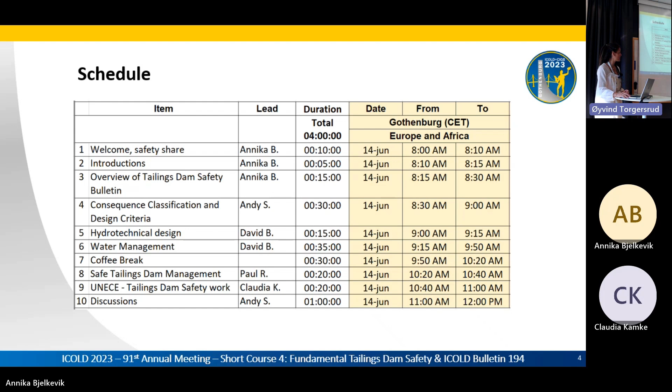So the introductions. I want to talk a little bit about why tailings dam safety is important, and I guess that's not a new question to you all. I guess everyone knows why it's important, but also a historical perspective in a way, and a little bit put the new bulletin into a global context.

So the text is fairly small in the figure here, but tailings dams have a history of about 100 years, a little bit more now, maybe. And in the beginning, the tailings dams were small. The volume of tailings was not so much, and the dams were fairly small. I don't believe that the information on how many tailings dam failures there were in the beginning is complete. We probably don't know all of them.

But in the 70s or in the 40s, high capacity earth moving equipment was introduced, and then it was easier to build larger dams. And then in the 60s, the increase in production and larger tailings dams was quite significant, and that also increased the number of failures.

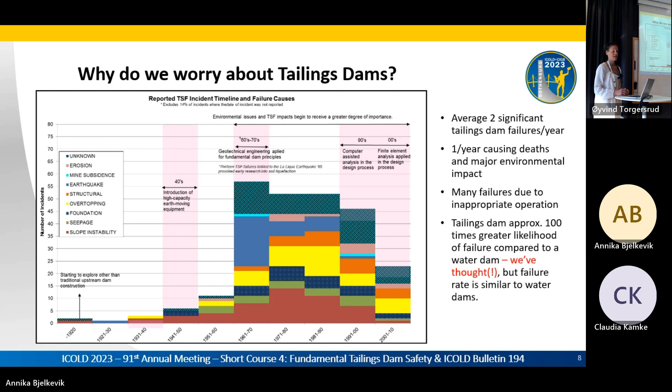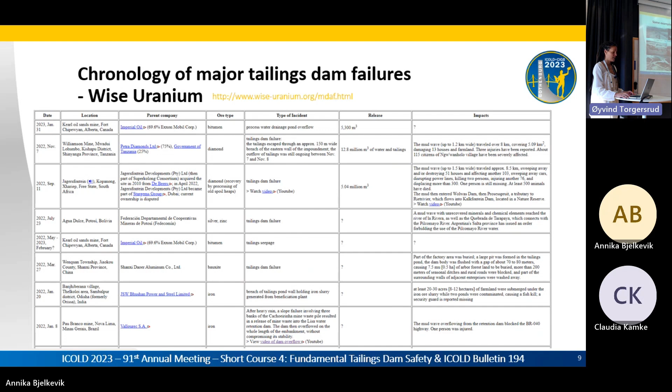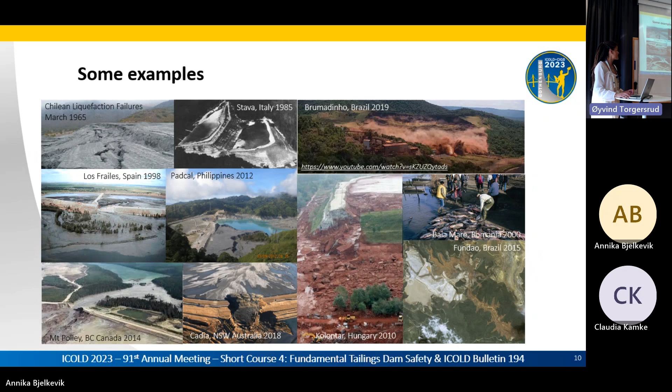And maybe all of you already know this web page, WISE Uranium, where most failures are listed. And we do also know a lot of examples of tailings dam failures that have happened recently, or not just recently, and we don't want to see this. And the question is, can this sort of happen to you?

These are statistics from Nayan Rana, who's a member of our committee, from his thesis work. The failure rate is more or less constant over time. We see increasing volumes because the dams are getting larger. The failure modes continue to happen, and the number of fatalities is more or less the same. And this is something that the industry needs to change.

And there has been a world response to this. Professional bodies like ICOLD, ANCOLD, CDA and others were doing a lot of things before, but even more now, and also industry guidelines like from ICMM and MAC. And as we heard from the keynote speaker, John Houchin, yesterday, the investors have had enough. And if the money doesn't come, the industry really has to change.

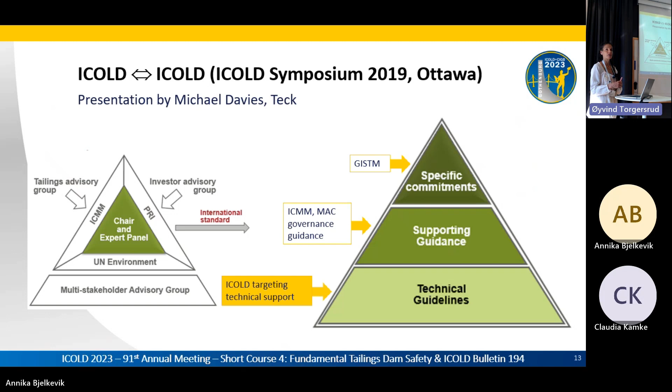And then we have the technical guidance, where ICOLD can play a role and help out with the technical guidelines. The ICOLD Tailings Dam Committee has over the years produced a number of bulletins with technical guidance. The last one, Tailings Dam Safety, is on the ICOLD webpage as a preprint. We don't really know when it's going to be published and available for everyone, so at the moment only members of ICOLD can get hold of it. So that was an introduction, and now the overview of the bulletin.

We worked on this bulletin for about four years, with a working group representing Canada, Australia, Sweden, Brazil, the Czech Republic, South Africa, the US, and the UK. The rest of the committee members also reviewed the bulletin. All the national member countries could review it, and we received quite a few comments. Some international experts were also asked to review it. So we think it's thoroughly worked through, but we're already looking at updating it. We'll see if it's published before we have a version 2.

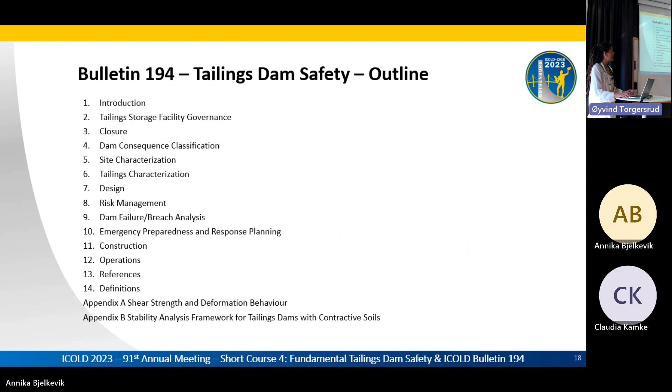So this is the outline of the bulletin. I like to visualize tailings dam safety, and maybe other safety areas, like a three-legged stool, where governance is the seat, and then you have design, construction and operation, and they're all important. You can't sit on the stool if those four parts are not there. The corporate culture within the dam owner company is also important, and I visualize that as the material of the stool. If it's not a good material, it won't last long anyway. So all these aspects are really important; the bulletin focuses on design, but the other parts are equally important.

I also want to highlight that the third chapter is the closure chapter. Closure is really important, and you need to plan for closure at the start, but often closure comes at the end of documents, and we really wanted to put it at the beginning of the document to emphasize it even further.

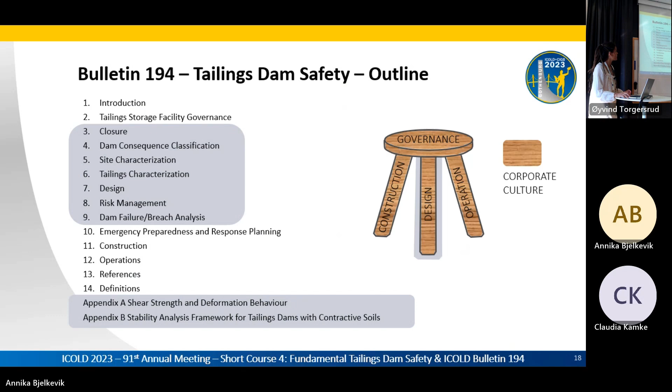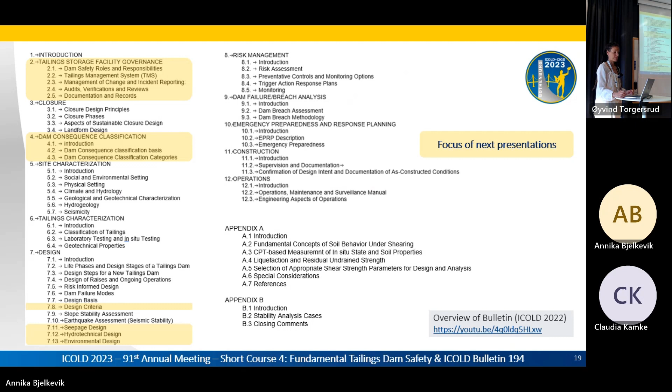And this is sort of the next level of headlines from the bulletin. The yellow marked ones will be covered by my colleagues from the committee in the coming presentations today, and the rest I will go through fairly briefly now.

So closure needs to be included already from the start of the project. It's difficult if it's an old facility and closure was not included from the start, but as soon as possible, start planning for closure and construct and operate the facility towards closure. So in a way, I like to see mining operations as a measure to create the closure goal instead of just mining. So trying to make closure a goal equal to more or less the production to mine.

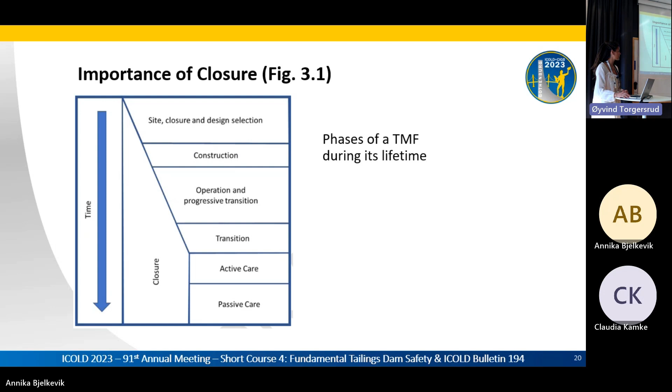And then we know that planning for mining is not that easy. It's changing over time. You don't know when you start a new mine. I've never heard of a mine that started and finished at the end of mine life that was originally set from the beginning. So things are changing, and we need to be flexible and review things and change as we go. And then when operation closes down, we have the transition phase, and after that, the closure measures are hopefully done, and we can just verify that the closure is working as expected during the active and passive care.

And then chapter 5 is about the site characterization. So the characteristics of the site will give the conditions that have an impact on the design, construction, operation, and closure, and it's important that we have identified those correctly. And it should cover the whole dam site, with the dam site meaning not just the area of the tailings facility, but the surroundings and also the area that can be impacted by a tailings dam failure. And if it's an existing facility, it also includes the deposited tailings and the characteristics of that material and the structures that are already in place. And it needs to be an iterative process as things might change over time.

Climate change is one thing that we need to consider. And it should cover a wide range of different aspects, from social and environmental setting to geomorphology, morphology and climate and hydrology, geological and geotechnical conditions, and hydrogeology and seismicity, and maybe others like cultural things as well. We have that in Sweden. We need to consider old cultural things that might be in the area. And it requires a broad mix of professionals who have knowledge in all these different areas. And we sort of have only one chance to get it right from the beginning. As it's also an iterative process, we can add data over time, but it's really important to get it right from the beginning.

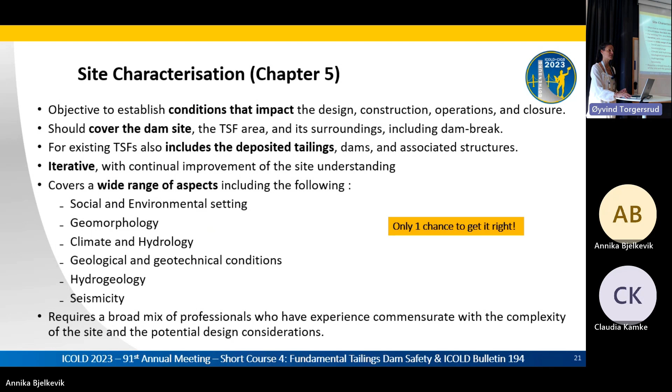And then we have the tailings characterization. The characteristics of the tailings have a significant impact on the tailings facility, and especially for the upstream construction, and also for the dam breach studies, how it's going to behave if the dam breaks. And we really must understand what kind of material we have to deal with. And the previous bulletin, number 181, goes deep into this characterization of the tailings.

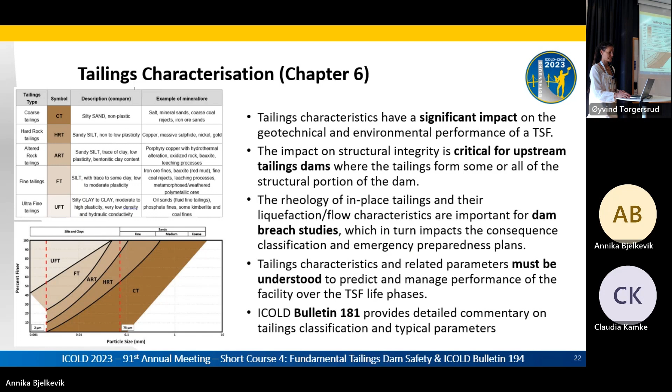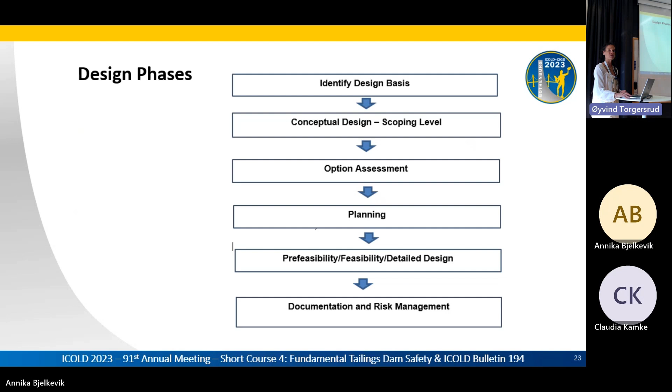And then we have the different phases of the design, and we need to go through those and maybe reassess and go back and recheck the design. So it goes from identifying the design basis and the conceptual design, looking at different options, and planning and pre-feasibility, feasibility or detailed design, and then documentation and risk management. And documentation, I find, sounds very easy, but in reality it's very challenging. And I guess most of you know that for old tailings facilities, it might be really difficult to find documentation from the beginning.

Seismic design criteria need to be considered, and especially for closure. And in some areas, I mean, in Sweden, we don't have so many seismic events. Chile is the opposite, I guess, on the scale. And even if you don't have a lot of seismic activity at the site, it still needs to be considered.

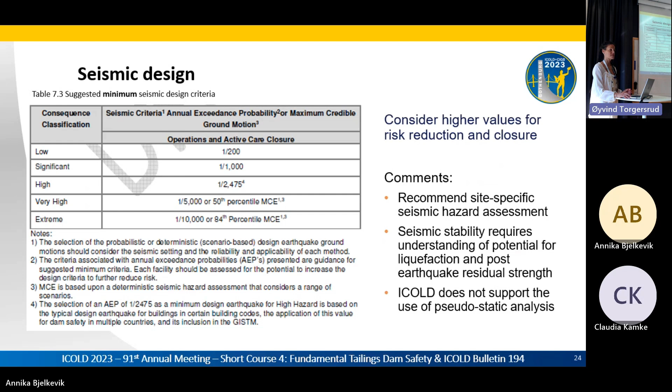We recommend doing a site-specific seismic hazard assessment and understanding the potential for liquefaction, which comes into the characterization of the tailings. And we also want to emphasize that ICOLD does not support the use of pseudo-static analysis. Andy is giving a good motivation for that in one of the recordings that we have on YouTube. I'll have a list with all the links to our YouTube recordings, so I won't go deeper into that now.

And also the stability analysis is in the same recording. Stability analysis is one of the key elements to define if the dam is safe or not. Often it's based on limit equilibrium analyses, which is adequate if the tailings material or the material within the dam structure and the foundation are dilative materials.

The figure with the soccer balls symbolizes the dilative properties, where if you're going to move the balls, then the volume has to expand. Otherwise, you can't change the geometry of the pyramid. But for contractive material, which is symbolized by the house of cards, the effort to get it to fail is very small. You barely have to touch one of the cards and it's all going to collapse. So we need to assess the residual strength for contractive materials. We need to consider drained and undrained situations.

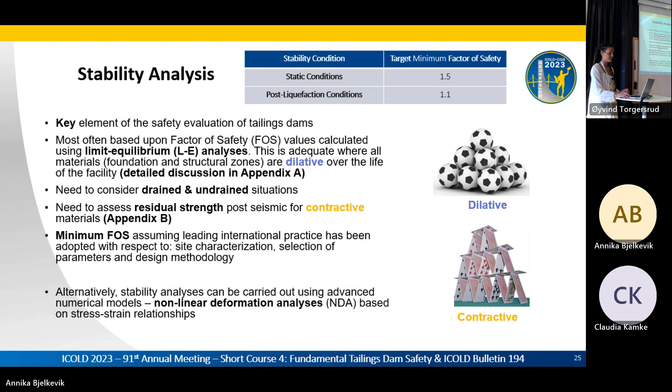Alternatively, analysis can be done using advanced numerical models as well, and I think that is getting more and more common in the industry, which is good. So all tailings dams have to be analyzed for liquefaction, and it's often a critical failure mode for upstream dams. And there should really be proof that all the materials within the dam and the foundation are dilative if liquefaction is not going to be analyzed.

And we should consider both seismic and static triggers. Static triggers are difficult to assess, and we might not fully know them. So often we have to assume that they are there and not really believe that we can identify whether we know all of them or not. And the same conditions apply for closure. Liquefaction should be mitigated if it's possible for it to occur for closure.

So this is the link for the recording where Andy is going through stability assessment, and the ICOLD Bulletin is addressing this in detail as well. And the section there is from Brumadinho.

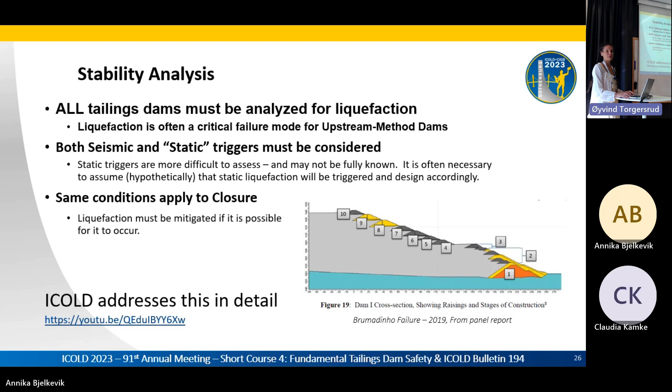And the design of the facility is not the end. The following chapters in the bulletin: risk management, dam failure and breach analysis, emergency preparedness planning, construction and operations are equally important. There is the ICOLD Committee on Public Awareness. They are starting now to write a bulletin on emergency preparedness and response planning, which is going to be a cooperation between us and some other committees as well. So we're going to dive a little bit deeper into that as well.

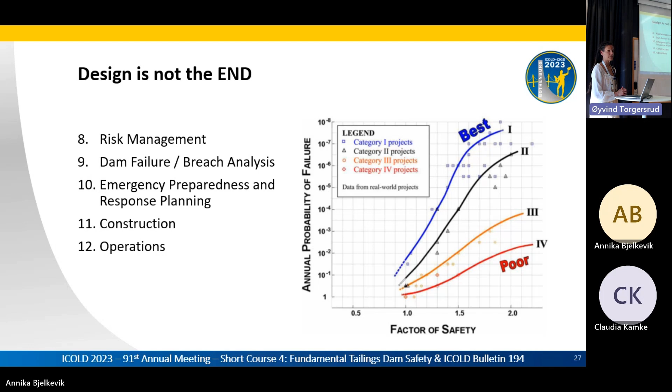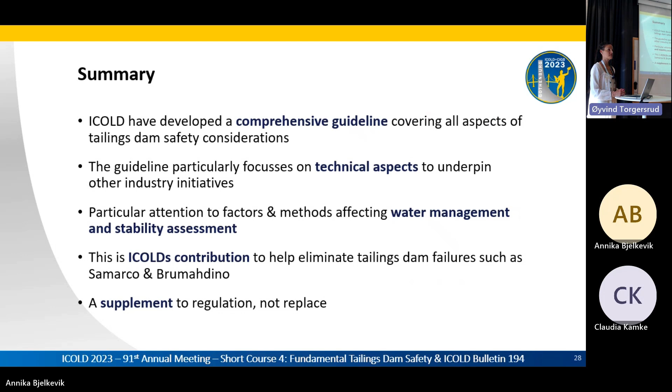So in summary, we believe that we've developed a comprehensive bulletin that covers all the aspects of tailings dam safety considerations. The bulletin focuses mainly on the technical aspects to underpin these other industry initiatives. We pay particular attention to factors and methods affecting water management and stability assessment. We see this as ICOLD's contribution to help eliminate tailings dam failures in the future. We hope this is going to be a supplement to already existing regulations in different countries. We haven't written the bulletin to replace regulations, but hope it will be included.